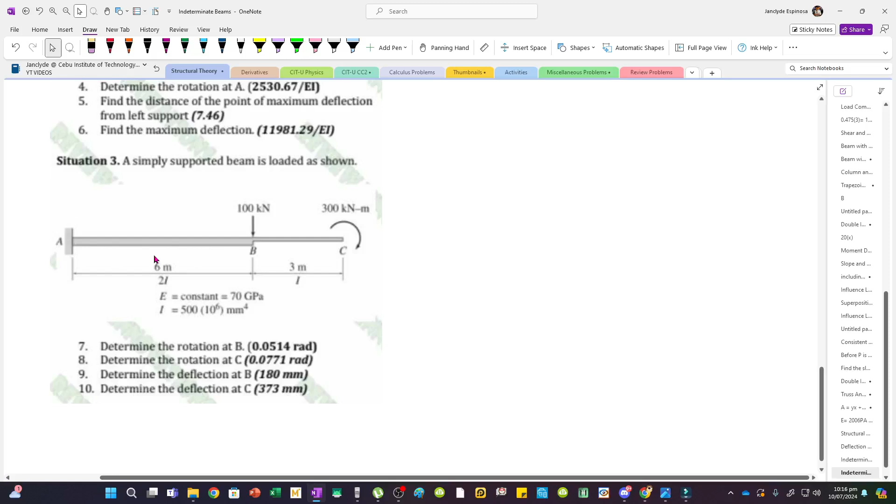Now, let's solve these problems. So we have a simply supported beam and a non-prismatic beam. But both of these are determinate, so thankfully, we have easier problems.

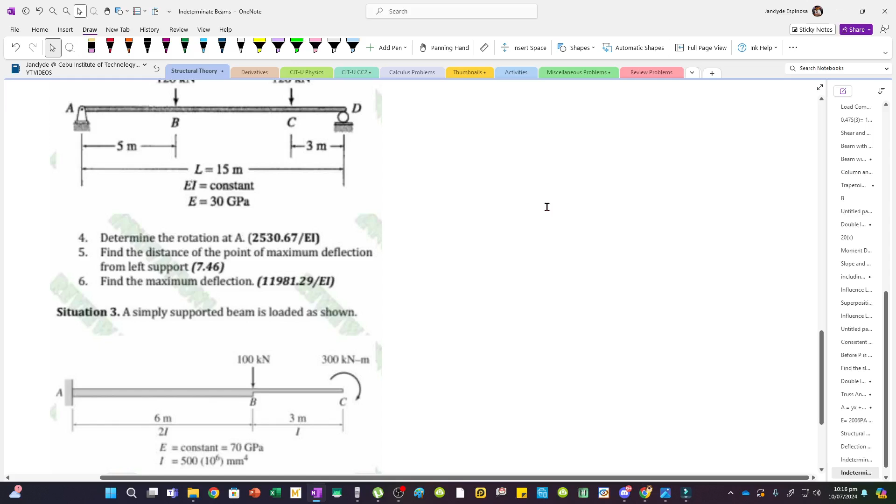So here we have a simply supported beam, and we have to determine the rotation at A, the distance of the point of maximum deflection from the left, and also the maximum deflection. So first, we have to solve the reactions.

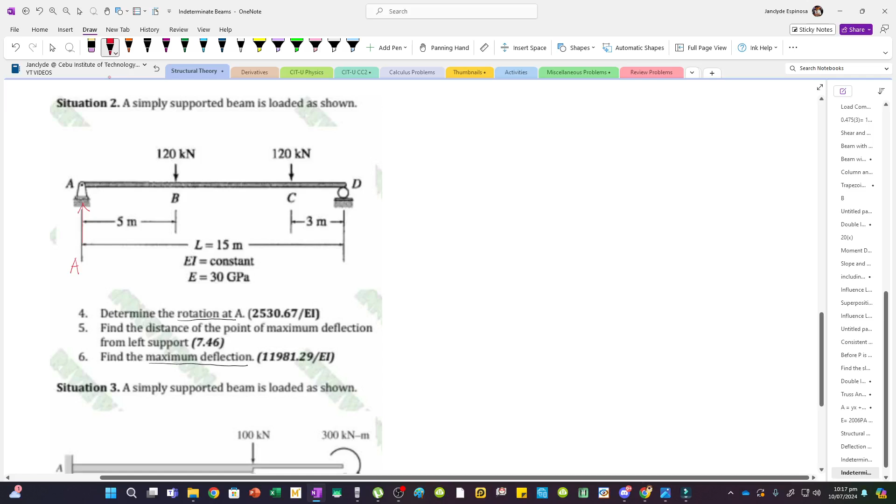We have a reaction here, let's call it AY, and this is DY. Now, to solve AY, I can take moments about D.

So I have AY multiplied by 15, minus 120 multiplied by a moment arm of - if the whole length is 15, then this must be 7, since 15 minus 5 minus 3. So the moment arm is 7 plus 3, which is 10. And for this load, minus 120 multiplied by 3. So set that to 0.

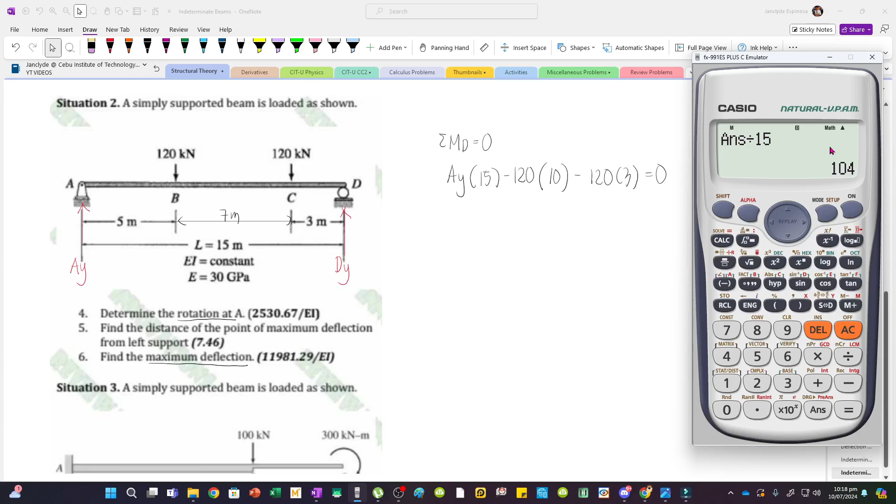We have 120 times 10 plus 120 times 3. Divide that by 15. This is the reaction at A. So we have 104 kN.

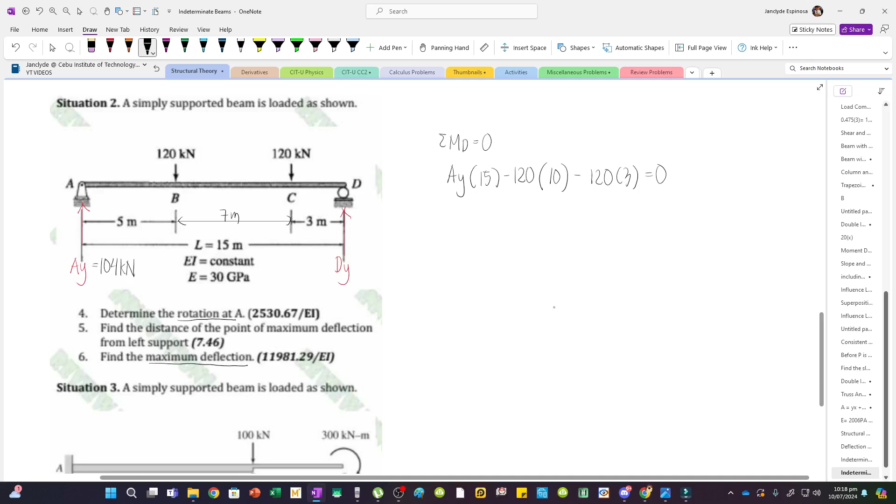And then, for double integration, our origin is from the left, and our cut is just right before the very last segment. So that means I don't have to solve DY, I don't need that, so I won't solve it either.

Now, first, I'm going to form EI y double prime. This is our moment equation. So this is 104 multiplied by x - again, this is x - and then minus 120, and then its moment arm going to the cut.

It's going to be x minus 5, deduct that - use pointed brackets because we have a minus. And then we have minus 120 again, multiplied by x minus 12, that distance. So x minus 12, let's integrate that now.

So now we have EI y prime. This is now the slope equation. So this is 104 x squared over 2, minus 120 times x minus 5 squared divided by 2, minus 120 times x minus 12 squared divided by 2.

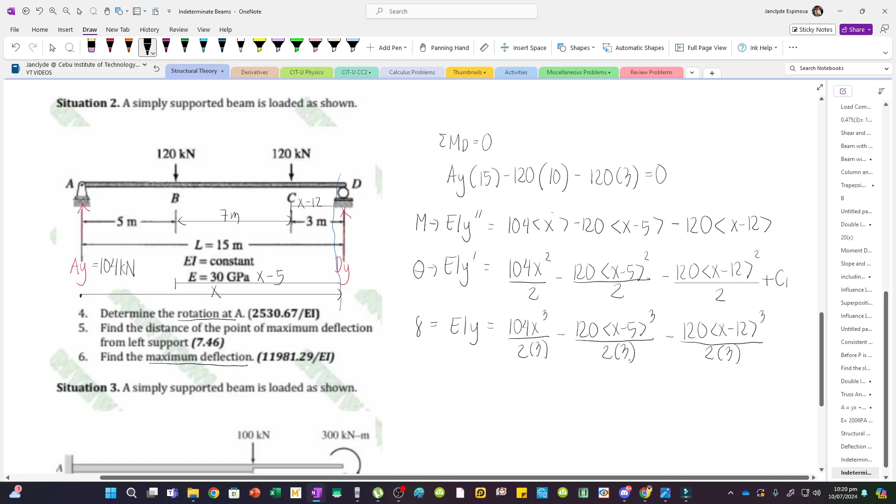So this is now 104 x cubed over 2 times 3, minus 120 times x minus 5 cubed divided by 2 times 3, minus 120 times x minus 12 cubed divided by 2 times 3. And then plus C1 times x. And then a new arbitrary constant appears because we are now integrating twice, so plus C2.

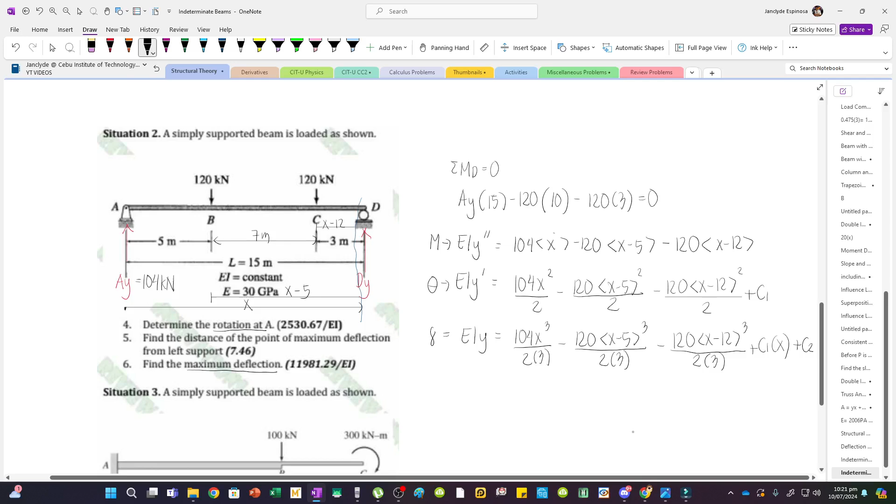Now for the boundary conditions, let's check the support conditions. At x equals 0, there's no deflection there, meaning y equals 0. Meaning, if you have this condition, C2 always becomes 0, since at x equals 0, y equals 0.

Now how about C1? To solve C1, we have this other boundary condition: at x equals 12 - wait, this is our origin, the whole distance is 15. At x equals 15, there's no deflection, so y equals 0. Then I can solve C1.

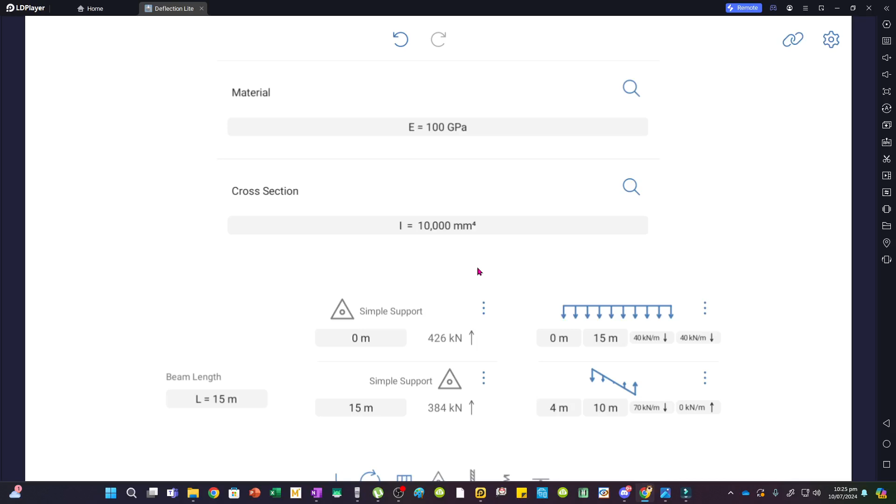Yung span is 15. And then meron 120 at 5, saka 3.

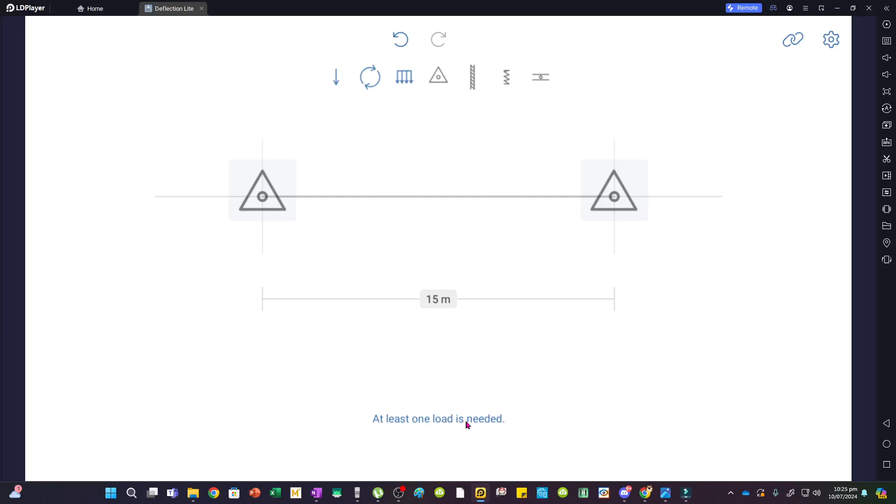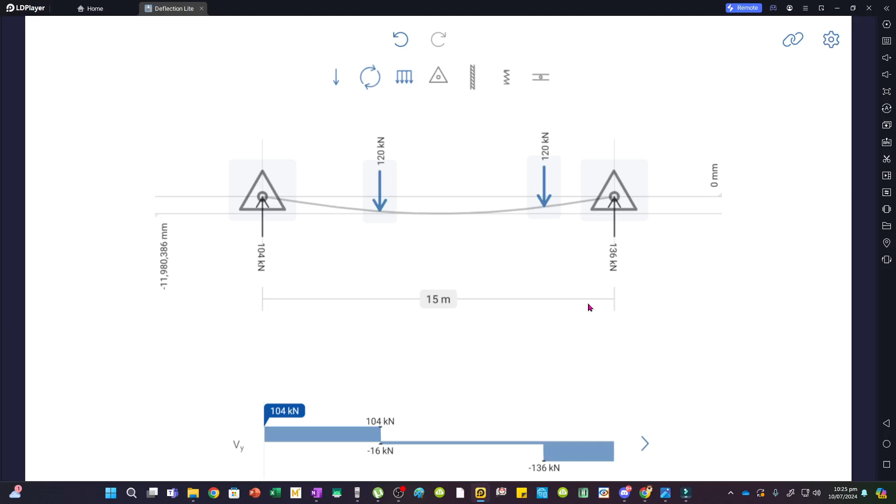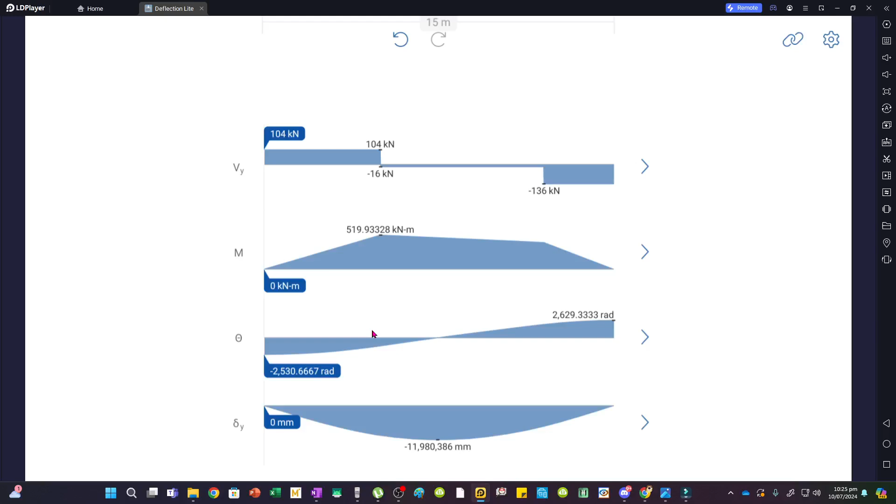So palitan natin ng 100 saka 10,000. Ito yung slope at A. So tama nga. 2530. Review natin yung solution natin.

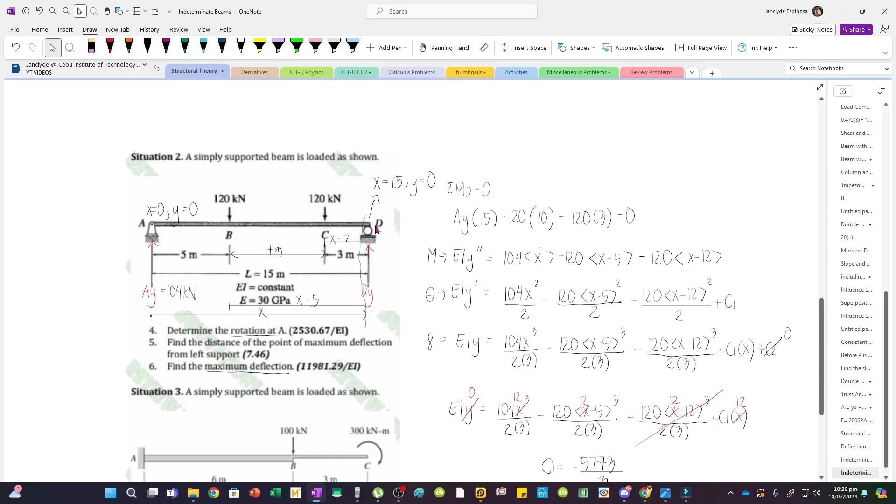104 times... Ay okay, sorry. X equals 15 pala. Kaya pala. Sorry. 15 yan, 15. Lahat ng yan, 15.

So ibig sabihin, C1 is a different value pala. So, 15 cubed over 6. And then, 120 times 10 cubed over 6. And then kasali pala to, kasi 15 minus 12 meron niyang value. So minus 120 times 3 cubed, divide natin by 6, plus 15 C1.

Set to 0, solve natin yung C1. So, 2530.67. And then negative, or in fraction form, this is minus 7592 over 3. So papalitan natin to ng minus 7592 divided by 3. Now the next question is, find the distance daw of the point of maximum deflection from the left support.

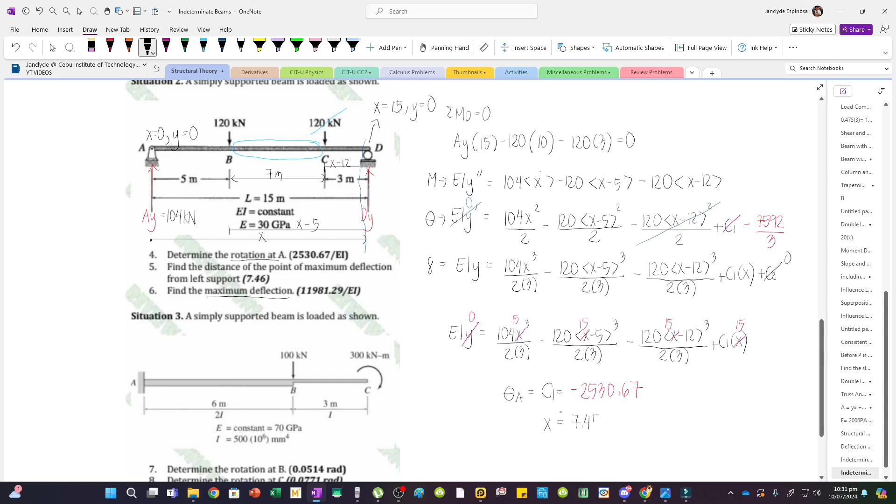Bale you really have to exclude this. So now the location of the maximum deflection is, by the way, ito yung slope at A. And then the location of the maximum deflection is 7.459 meters. And then I will just store this value sa A. Yan, kasi yung next question is the maximum deflection, so ito na yung gagamitin ko.

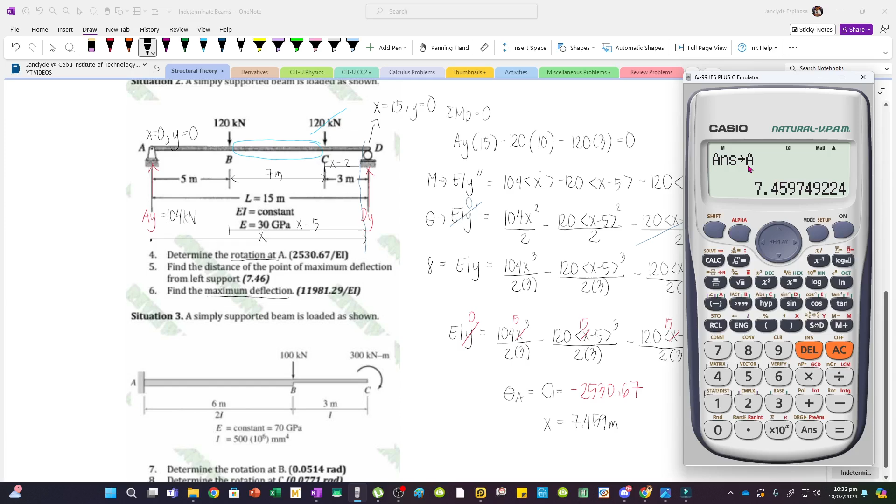Now to compute the maximum deflection, balik tayo dito sa EIY. Palitan natin yung C1, this is minus 7,592 over 3. Minus 7,592 divided by 3, and then let's substitute this value, 7.459.

But ito yung dapat mong tandaan: pag naka-pointed bracket yung equation mo, hindi yan pwedeng maging negative sa inside. Bale the location of the maximum deflection is 7.459. If you substitute 7.459 dito, diba, this expression will be negative. But hindi yan pwede. Ibig sabihin, you have to exclude this in your calculation of the maximum deflection.

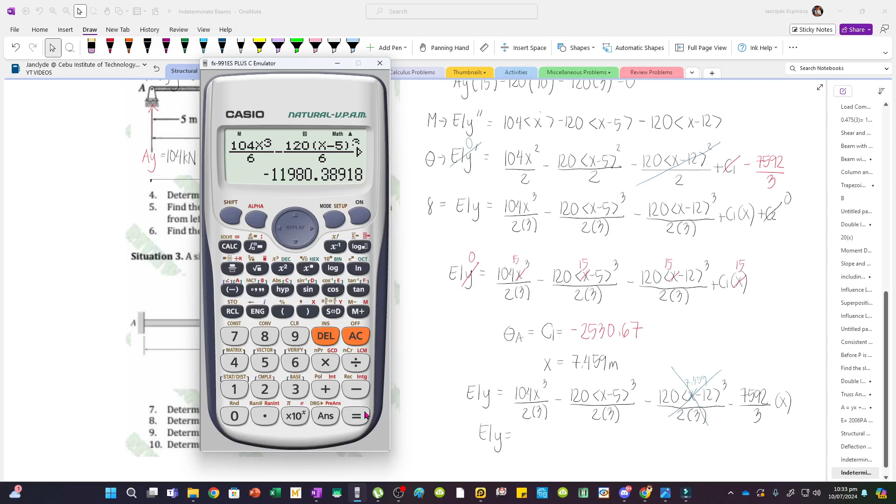So now to compute y, we have EIY equals, type natin to: 104 x cubed over 6, and then minus 120 times x minus 5 to the third over 6, minus, dito ka na, 7,592 divided by 3 multiplied by x, and then press calc, recall A. So we have 11980.39 negative.

And then divide both sides by EI. This is the deflection, the maximum deflection. So let's call it Y max. Be careful with what you will exclude.

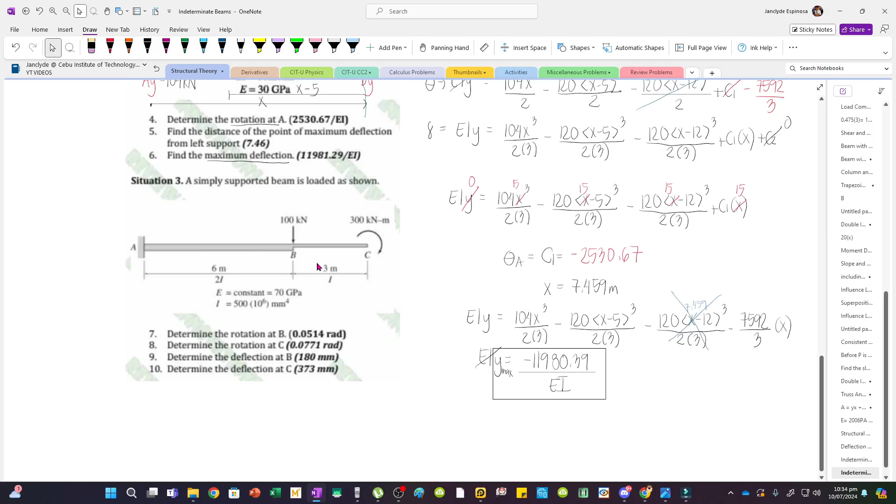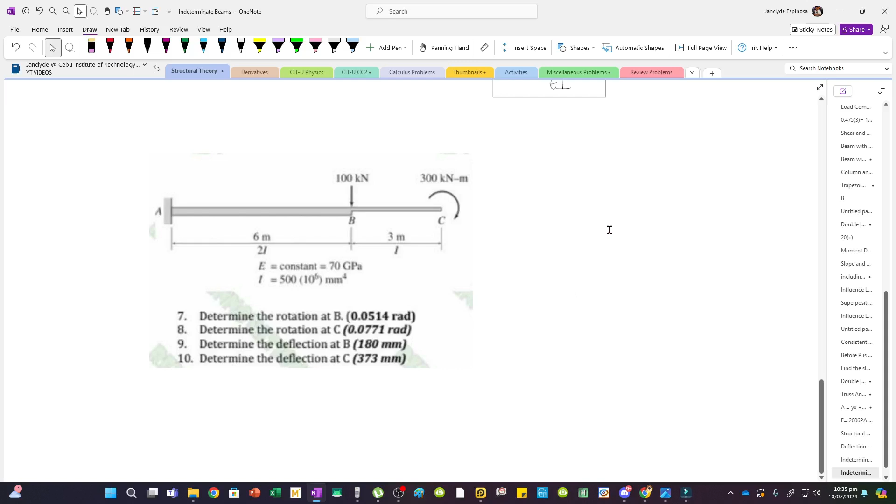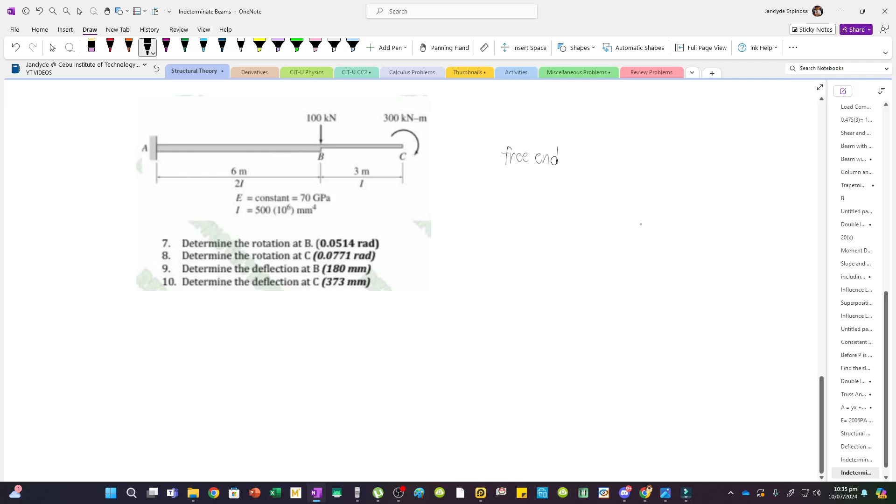For the conjugate beam, the free end becomes fixed, and the fixed end becomes free. So if we draw the conjugate beam, we have this figure.

This is the fixed support, and this is now free. This is 6 meters, and then... let's place it here. Six meters, and 3 meters.

So first, we'll make the moment diagram by parts. Let's project lines there. And then, let's redraw it.

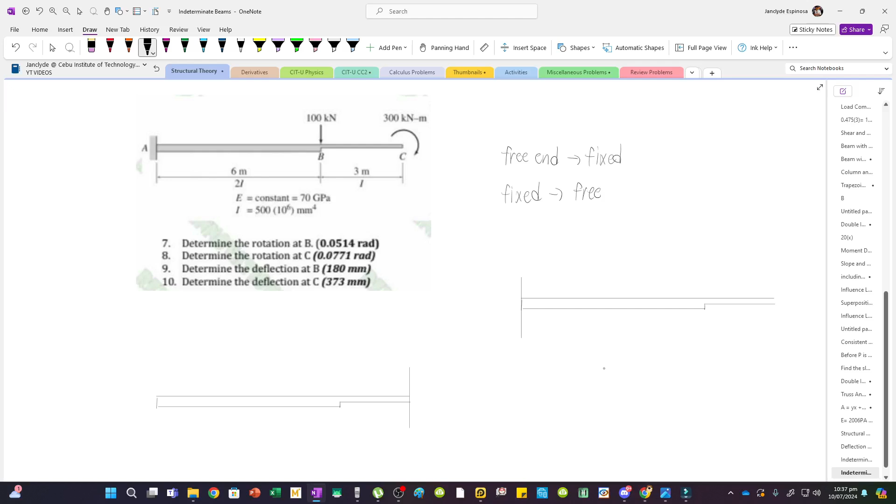Let's erase this. Then let's place the fixed support on the left side first. Let's apply the loads. For the loads, we have 100 kN, 100 kN, and we also have 300 kNm. This is 2I, this is only I, this is 6 meters, this is 3 meters.

So what is the vertical reaction at A? This will be 100. But there's actually a way to exclude this. You can pick your moment center at the fixed support to avoid solving the reactions, because if your moment center is there, you will exclude all the loads at that point.

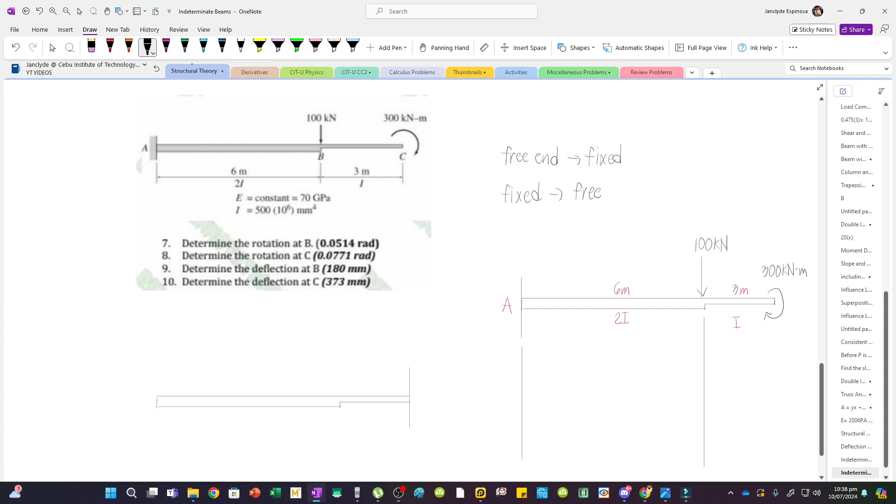So first, let's draw the moment diagram by parts. Let's project lines where there are loadings, here and here. But you have to take into account that the sections are varying. This means here, this is 100 kN.

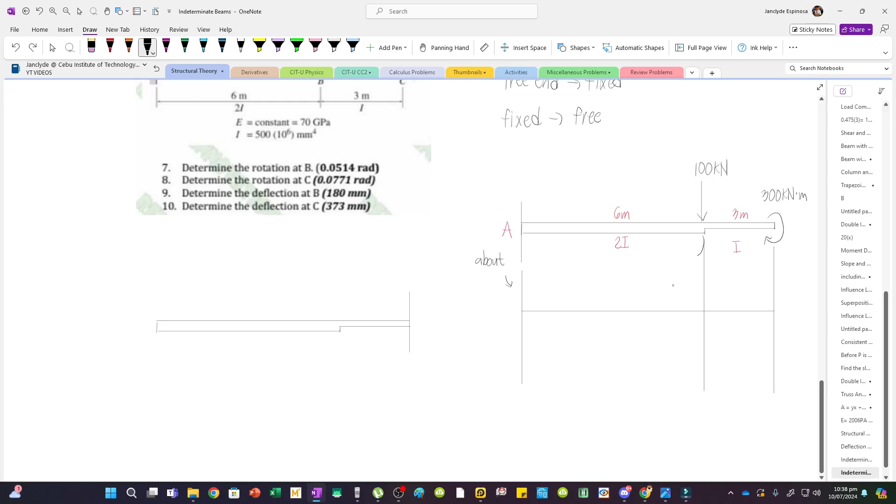And this will cause, if this is our moment center about A, if the load causes the beam to rotate downward, then it's a negative area. This load causes the beam to rotate downward if you hold it, so we have a negative area. From 100, we have 100 times 6, which is 600. But we have to divide this by EI. However, EI is not constant, so it becomes E times 2I.

So now this is 300 over EI, I hope you would agree. Now how about for the 300 kNm load?

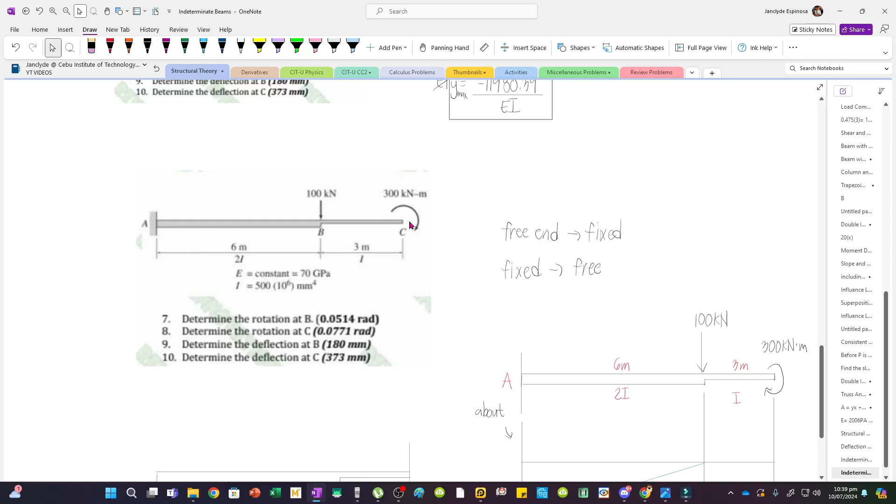Let's check. This is a clockwise load, so this will cause the beam to rotate downward, meaning we still have a negative area. I will just extend this. You can overlap it if you want, but I don't like to overlap because it confuses me.

So let's extend that, and this one too. So now I have this line, and we have 300 kNm. Since this is I, automatically, just draw a constant line. And this is 300. By the way, this is the zero line, and this one too.

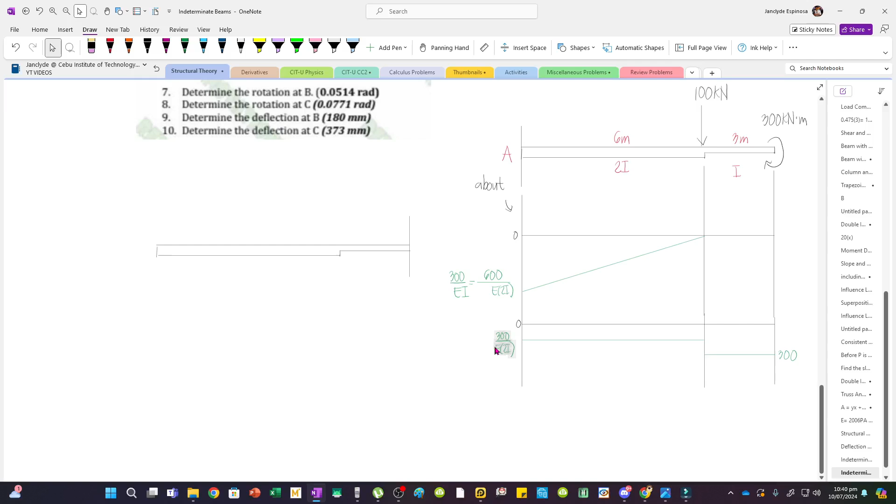But for the remaining segment, we have to divide 300 by 2. Let's extend that. This now becomes 300 over E times 2I, which becomes 150.

And so this is now what we'll apply to the conjugate beam. Whatever is in your moment diagram by parts becomes the loading on your conjugate beam. And the value of the shear will define your rotation or slope, while the value of the moment will define your deflection. So let's apply our loads.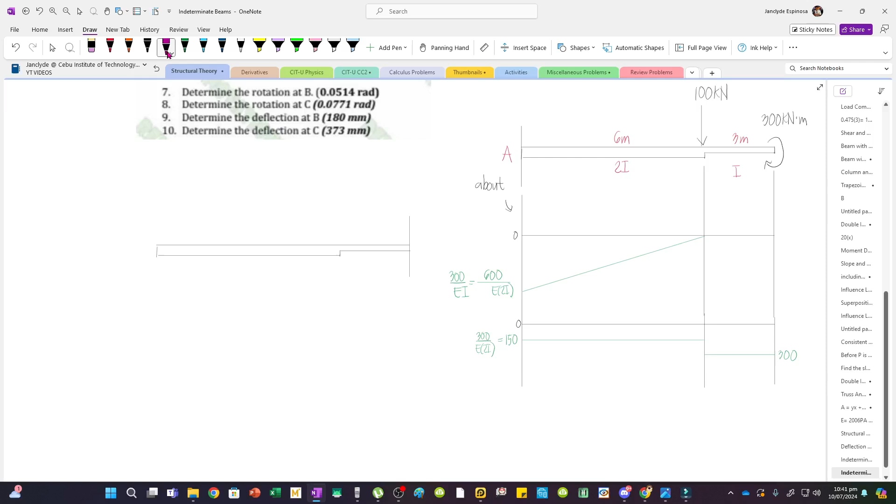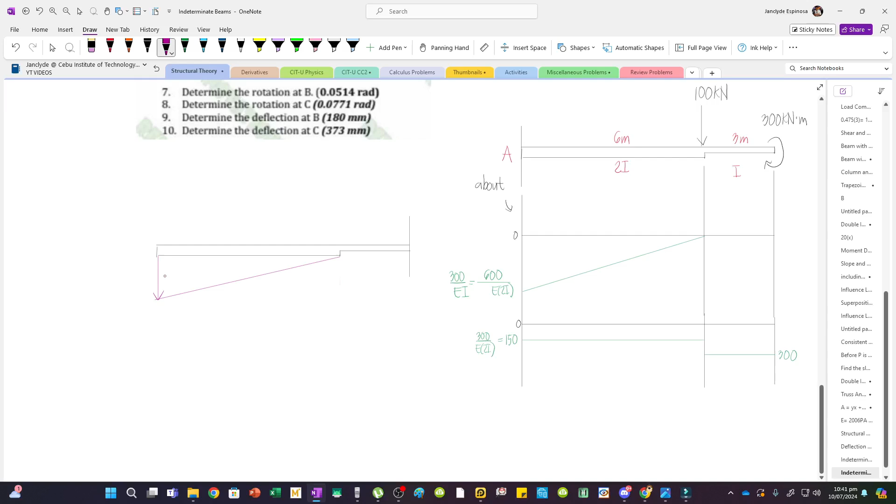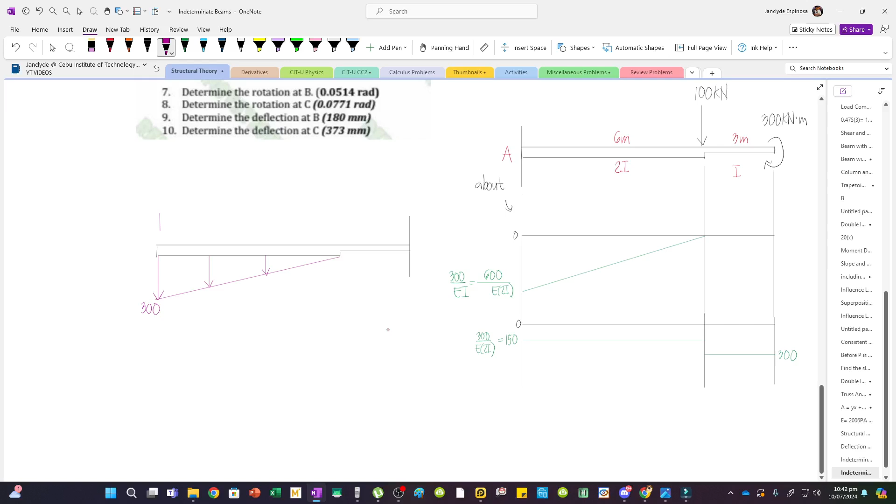So here we have 300. And since this is a negative area, this must be acting downward. This is 300. Now this is also acting downward, but I'll place it up here. So here I have a downward load of 150.

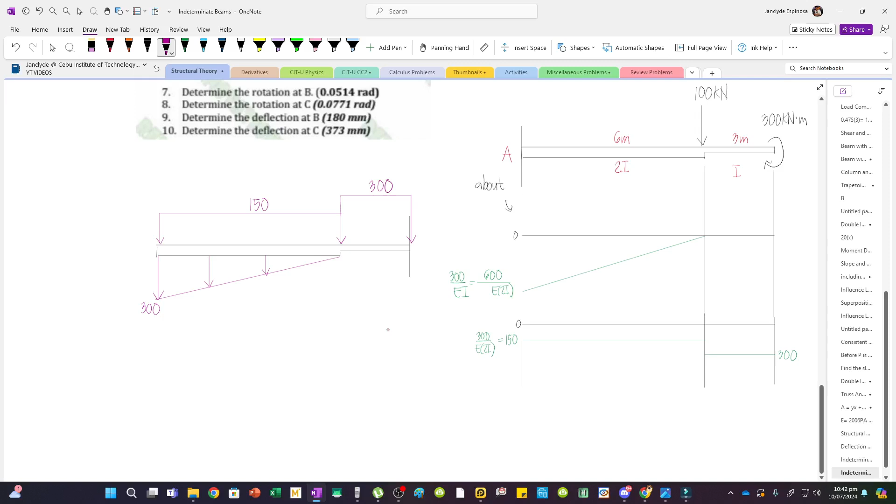And then here, 300. Now, the first question is, determine the rotation at B. So what do we solve for? What we need to solve is the shear at B.

Now you don't have to draw the full shear and moment diagram. Just make a cut at B, and solve for the shear at that point. So for the shear, let's say VB, we have the area of the triangle - this is 6 meters, this is 3.

The area of the triangle is minus 1/2 times base. What is the base? The base is 6, height is 300. And then minus 150 multiplied by 6. So we have a shear value of 1/2 times 6 times 300, minus 150 times 6. Is that right? Both should be minus.

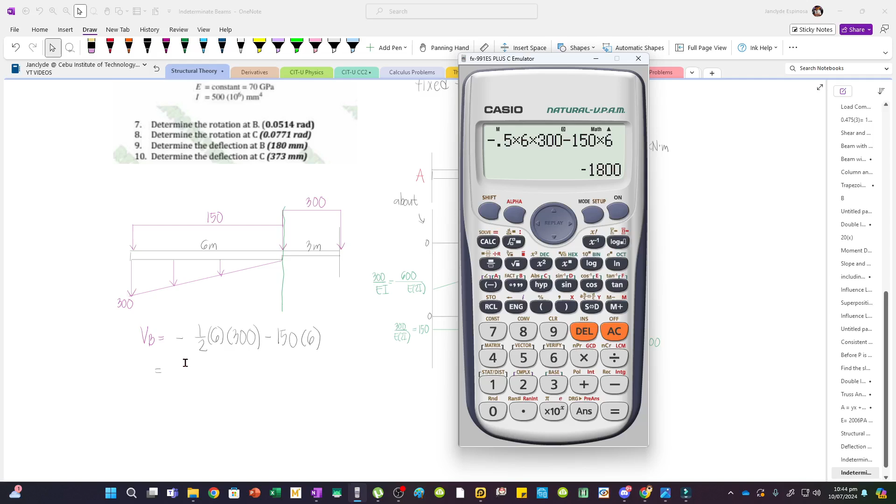So, yan. This is minus 1,800. But we have to divide this by EI. Bale, yung slope at B, diba, this is naka kN m squared yan. So minus 1,800 kN m squared, multiply natin by 1,000 cubed, and then divide natin by EI.

Now, ano yung EI? E is 70 GPa. So convert natin to MPa, 70 times 10 to the 3. And then I is 500 times 10 to the 6. Yan. So solve natin yung rotation at B.

Dito na lang ako. Wait lang. So minus 1/2 times 6 times 300 minus 150 times 6, equals. Yan. So math formatting, decimal. Copy ko yan.

This is VB. Yan. So q, control G equals, rotation of B is VB times 1,000 cube over 70,000 times 500 times 10 to the 6.

So ano yung sagot? Tama ba? Tama. Minus point, hindi pala nakikita. Ito yung solution. So let's use 5 decimals. Yung sagot natin, minus 0.051. Yan. So tama yung number 7.

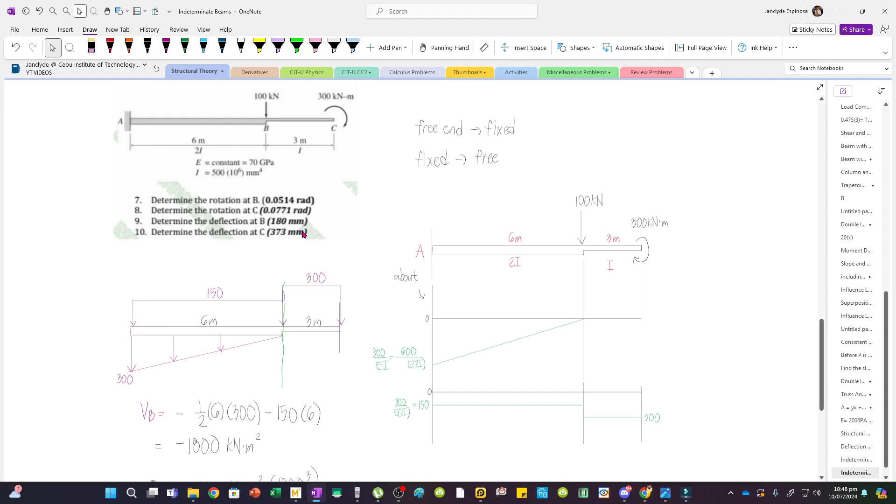Yan. So 0.0771. Check natin. 0.0771. So this is radians.

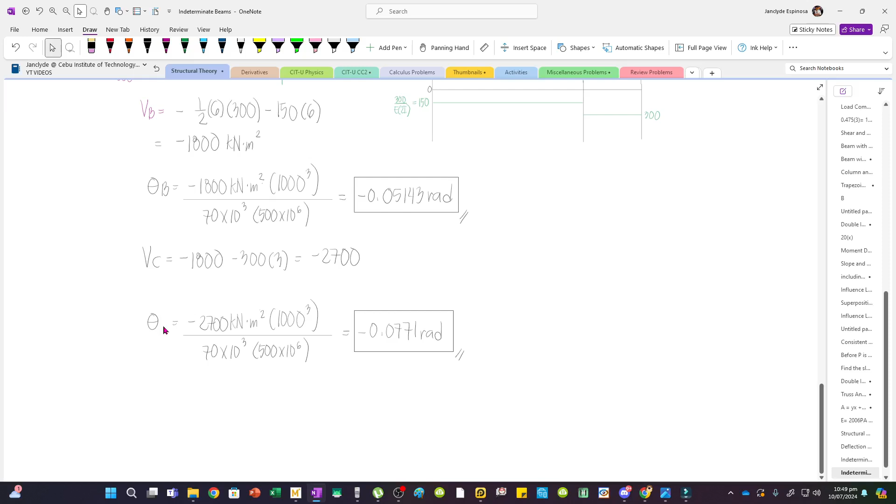Now dito naman tayo sa deflection. For deflection questions, moment na yung kukunin mo, hindi na slope. So this is for C pala. I mean, hindi na shear. So ano yung MB?

MB is gonna be, copy lang natin to, and then let's just add the moment arms. Now the moment arm of the triangular load going to be, yung centroid yan is nandito. So this is 2/3 ng 6. So 2/3 of 6 minus 150 times 6. The moment arm of this distributed load is half of 6.

So multiply natin yan by 3. And then divide natin to by EI. So modify na lang din natin to. We have MB, and then add natin yung moment arms. This is 2/3 ng 6, while this is 3.

Yan. So we have minus 6,300. And then this is now MB. Yan, MB. And this is now the deflection at B. So D, Control G, underscore B. Yan. So the deflection at B is minus 180.

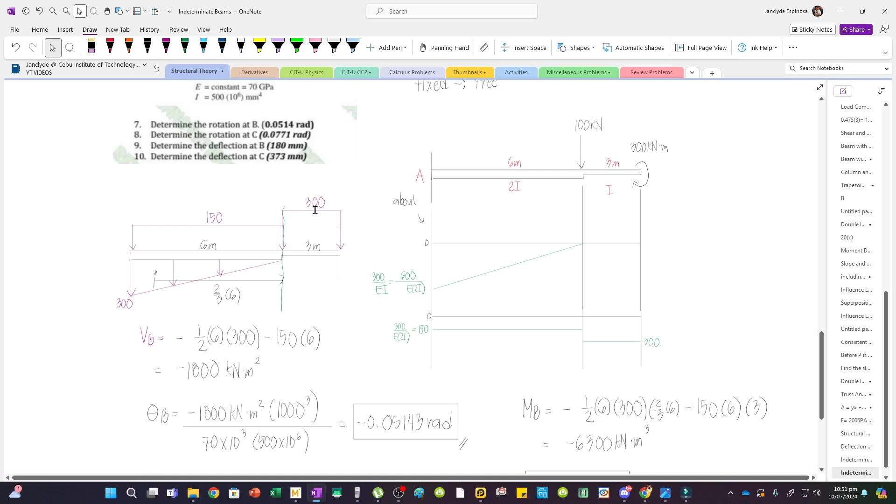And then finally, for the deflection at C, we're gonna solve the moment at C, considering the conjugate beam. So MC is, copy lang natin yung resultants.

But for the moment arm, we're gonna add a certain distance kasi this will now be 2/3 of 6, and then you're gonna add 3. So meron tong plus 3, and then minus 150 times 6, resultant nito, and then 3 plus 3, and then finally we have this load, so minus 300 times 3, and then the moment arm is half of 3, so 1.5.

Wait lang, may tumatawag.

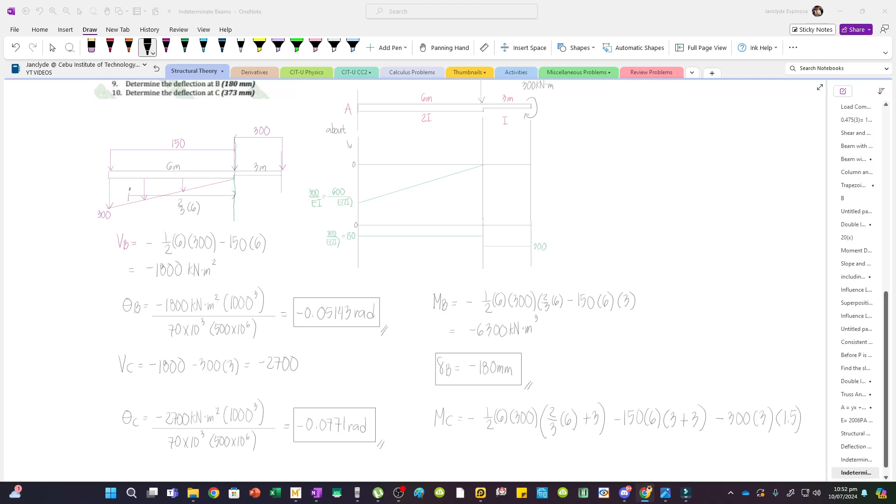So solving the moment, dito tayo, modify lang natin yung labels. This is now MC, this is now the deflection at C, and then for the moment arm, dadagdag tayo ng 3, saka dito rin, plus 3 yan.

And then add natin yung 300. So minus 300 times 3 multiplied by 1.5. Yan. So minus 13050. So then this is now MC.

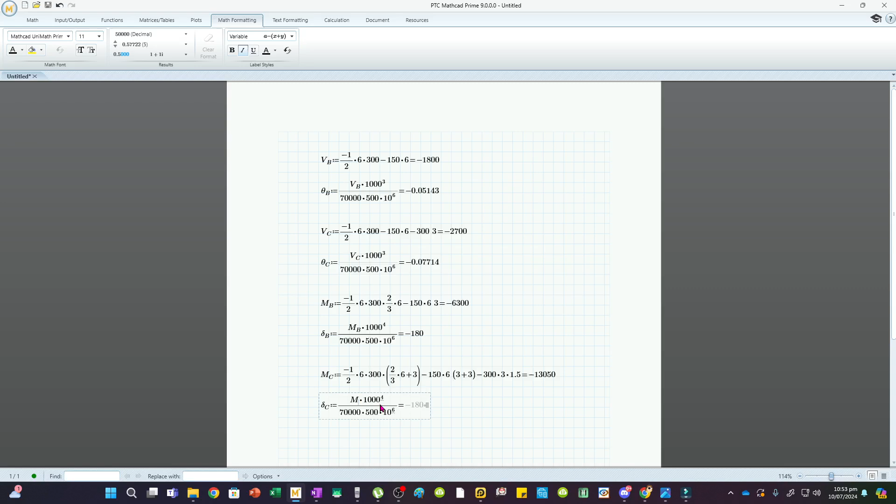So the deflection at C is minus 372.857. So check natin yan dito. 373. So tama lang.

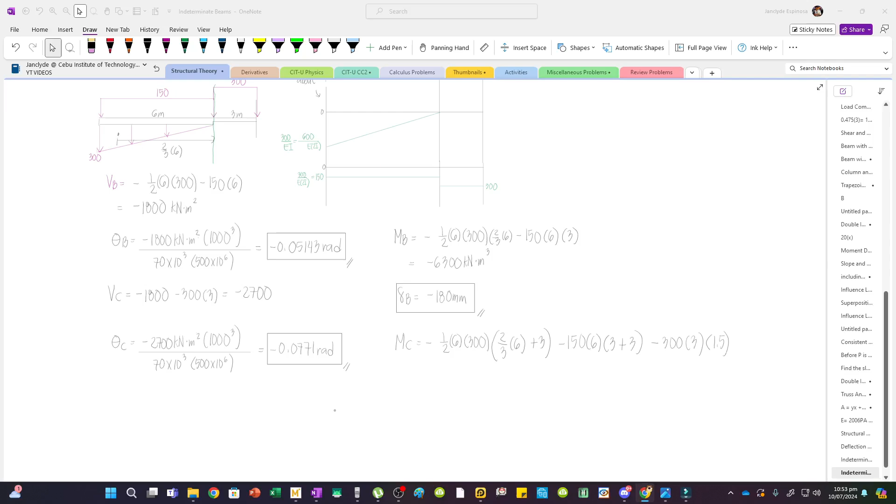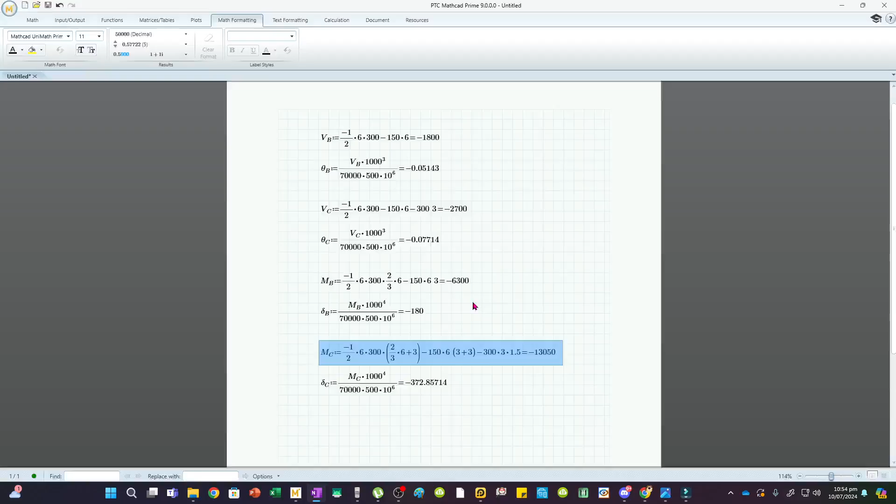Copy ko na lang. Ito yung MC. And then the deflection at C is this one. Yan. Wait lang po.